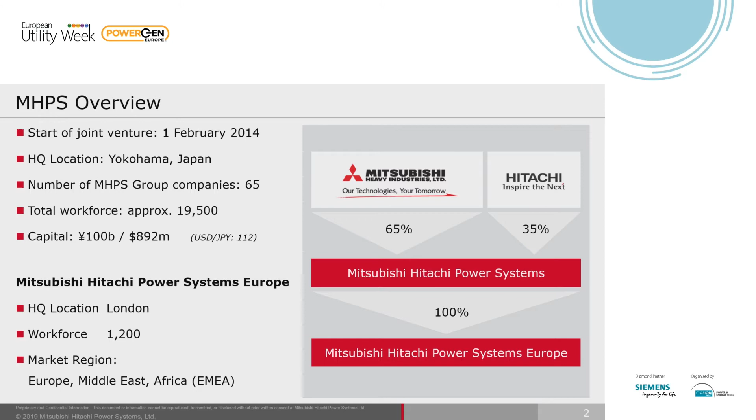So very briefly, I guess everybody knows who Mitsubishi Hitachi Power Systems is. It's a joint venture started in 2014, two-thirds controlled by Mitsubishi Heavy Industries, one-third controlled by Hitachi. In Europe, it has a large track record and names, more than 100 years, around the Deutsche Babcock branding. Things have changed quite substantially since then.

We used to be power plant builders. We have a world-wide track record where, as I'm always saying to my children, we used to be the bad guys - the ones putting into place dirty plants. In fact, these are probably the last two that are under construction, the last of the Mohicans, as they would say. But still, there are places on Earth that need them.

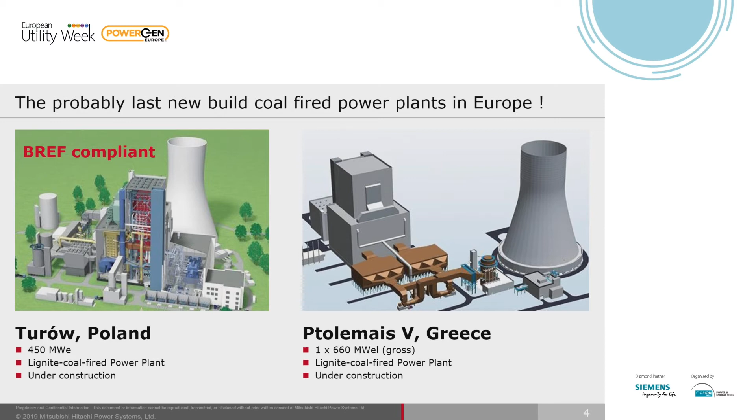But definitely we face a paradigm shift worldwide, and this has to comply with the new challenges that have addressed the branch quite substantially. So responding to the 3Ds, we were able to turn around the ship to meet a number of challenges around the decarbonization of the energy sector.

We feel that the core of the transition is about the commitment on decarbonization, and we built around that enablers like decentralization or digitalization, and commitments and tools like sectoral integration, the circular economy, and so on.

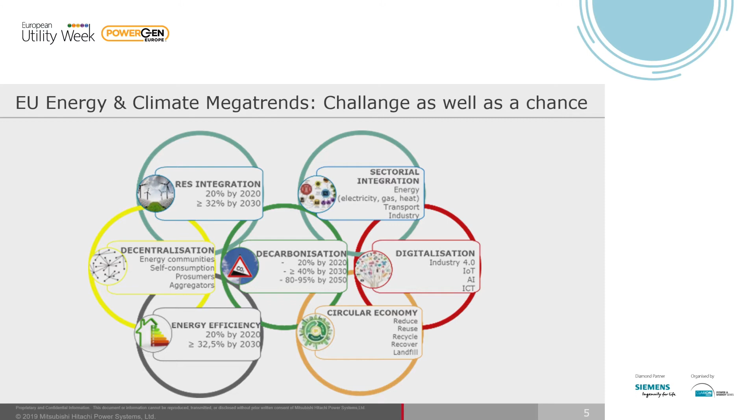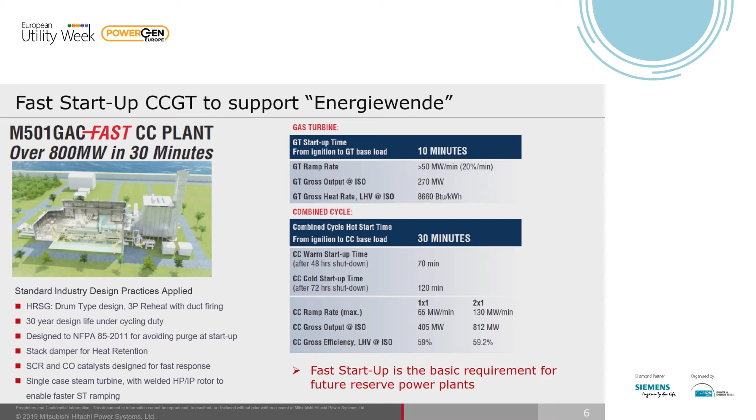So in that framework, we need to adapt our business, and of course we have products, and everybody is talking about gas being the enabler. We have brought products supporting what we call in Germany Energiewende - thermal generation, gas-based, gas turbine. This is something you all know about.

And the same holds true also about combined heat and power. I would like to leave for your thought the new adaptation of the German law on CHP, for instance, that has created an additional market demand on industrial products.

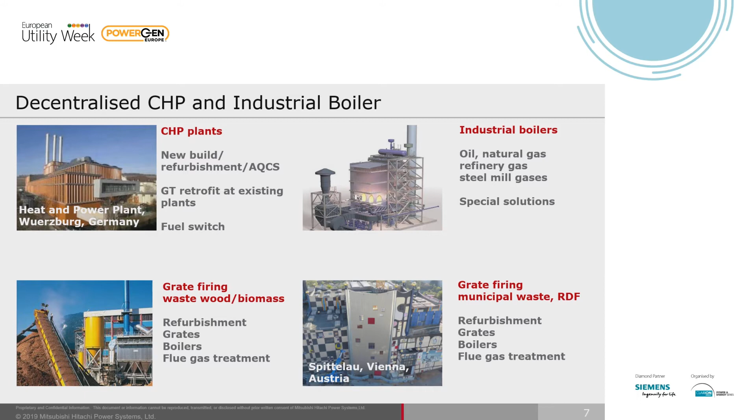So things are changing in what I would say the organic part of the business. Obviously, we have been quite active in zero carbon thermal emission. Zero carbon thermal generation means biomass. We have a vast track record, no need to spend more time on it.

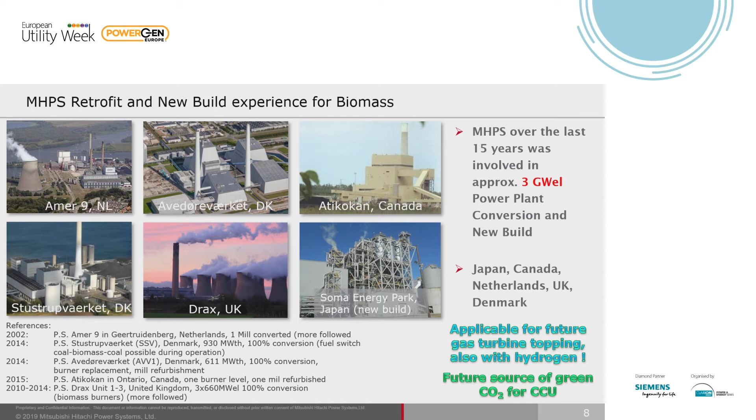We are currently retrofitting a wide number of power plants. So the technology is there, the business case is there, and I have put with green letters in the bottom right corner the word bio-CCS or CCU from biomass. We see the challenge of achieving negative emission sources by decarbonizing biomass-fired plants, but I will come back to that a little bit later.

This is a changing conference, and I have heard the word hydrogen in terms of policies, in terms of strategies, in terms of products. In our conventional business, we are proud to say that we have introduced a full-chain hydrogen strategy that is taking place today. That means we have the technologies to bring carbon-free hydrogen into the market today.

We recognize in our horizon that in the long term, around 2040, maybe a little later, green hydrogen - that means the conversion of renewable electricity into hydrogen via electrolysis - will be the predominant energy carrier. It will play a great role in securing carbon-free thermal generation, as well as industrial use and various applications already highlighted by previous speakers. But we feel that the demand of today and in the short term will be primarily met by what we call blue hydrogen.

That means hydrogen decarbonized at the source, or by means of reforming with integrated CCS - carbon capture, that means.

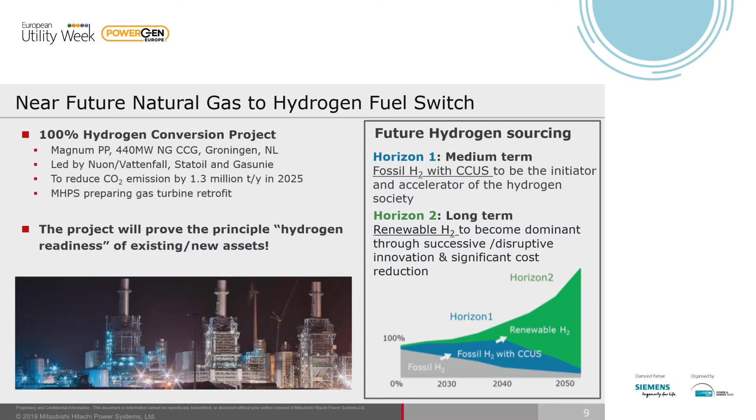Hydrogen that early, by 2025, will be predominantly blue, but carbon-free. We are talking about full decarbonization by 2050. So we feel that in that context, we will be able to avoid stranded assets to the maximum possible extent in the transition towards a carbon-free economy.

Now, this part of the business is, as I told you, the organic conversion - how we manage to change our pattern of products in the big-scale central power generation to accommodate the decarbonization challenge. But this is not the whole story.

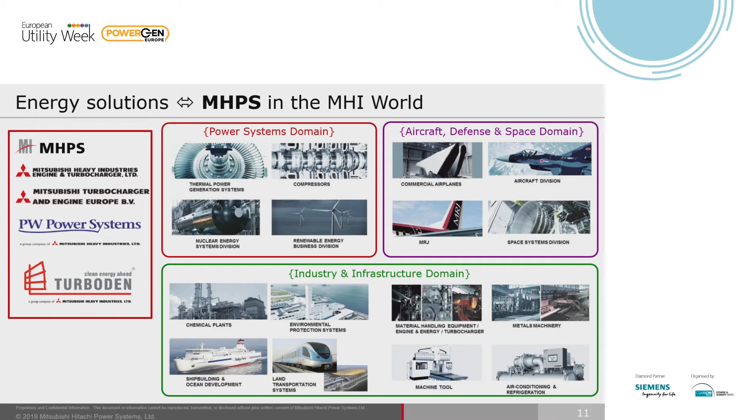The change that I'm implying in the title of my speech comes because of our full integration as a group company of a larger industrial conglomerate, the Mitsubishi Heavy Industries Group. We belong to the power systems domain, meaning we have a bunch of technologies that allow us to have a very complicated but ambitious vision that we have communicated.

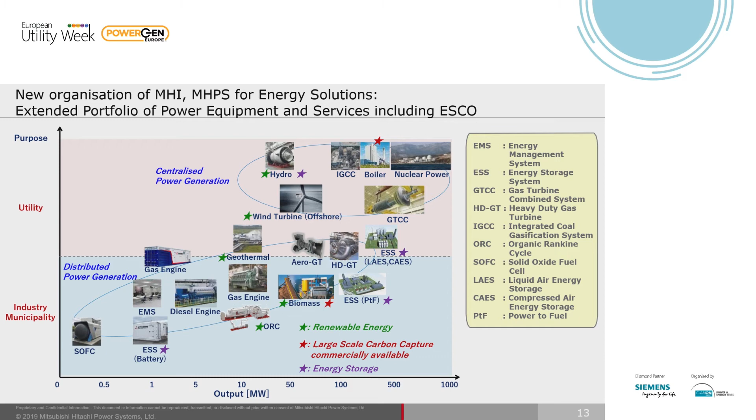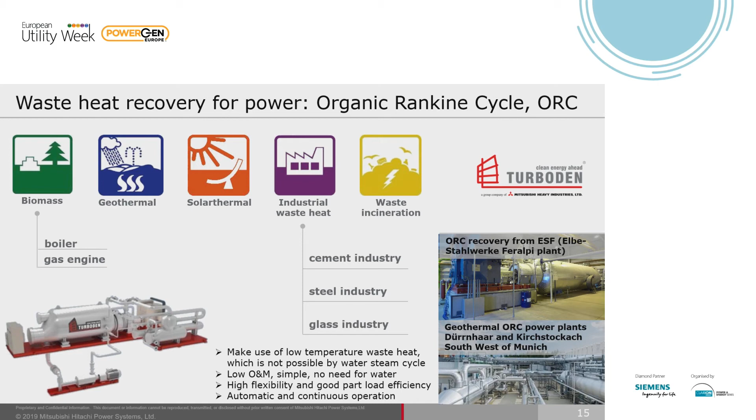That will combine in innovative products, and in the solution business, we understand our role as an integrator of different pieces of technology, starting from the kilowatt scale with our solid oxide fuel cell, moving into batteries, engines, organic cycles, aero gas turbines, up to larger central generation. That will be done in combinations already in the market, such as backup power or waste heat recovery with our organic Rankine cycle, or solid oxide fuel cells.

Needless to say, we are approaching the Tokyo Olympics. Those of you traveling to Japan will witness the Hydrogen Olympics there. We contribute a bit, for instance, with large flagship buildings already powered by our solid oxide fuel cells, which is our contribution to carbon-free CHP.

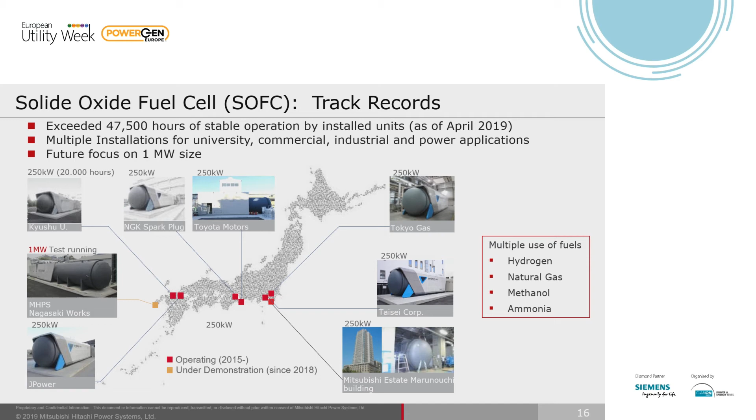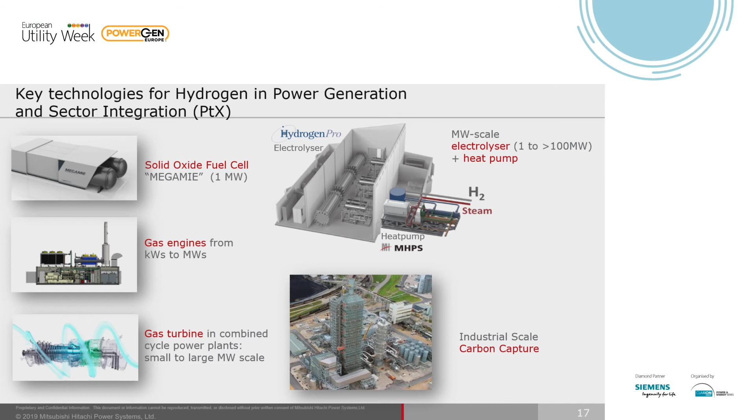That brings me to what we better understand as sectoral integration. That means, on the one hand, developing technologies able to utilize hydrogen from the consumption side, the demand side. On the other hand, we will have technologies using electrolyzers in a very integrated and comprehensive way, together with carbon recycling, to deliver synthetic fuels.

In the last couple of years, pilot projects like the ones we have brought into the market have reached considerable publicity. I had the opportunity to present, for instance, our methanol synthesis project a couple of years ago. Now we are moving to the next level of industrial maturity.

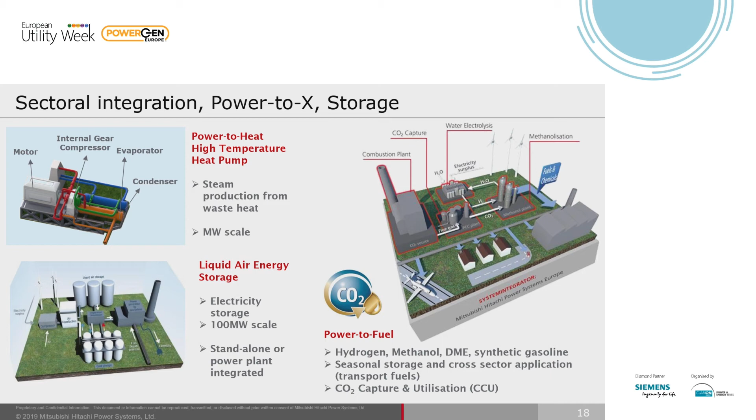My message here is that we have completed a number of research and development and industrial demonstration projects on fuel synthesis from CO2. We are designing, and have constructed, the largest CO2 capture plant, which currently uses CO2 for EOR in Texas - the Petra Nova project, 4,700 tons per day of CO2 separation. We would like to bridge the know-how and capabilities on CO2 capture and our background in the chemical industry toward synthesis of carbon-neutral fuels using CCU as a solution, for instance for Europe as well.

All this is nice, but it could never become a solution unless you have a digital platform. From the integration of assets, we already presented a couple of years ago the Tomoni platform. Tomoni comes from the Japanese word tomodachi, meaning friend - it means cooperation with our partners and clients, optimizing their assets, and on top of that, developing a new strategy on the basis of digital solutions.

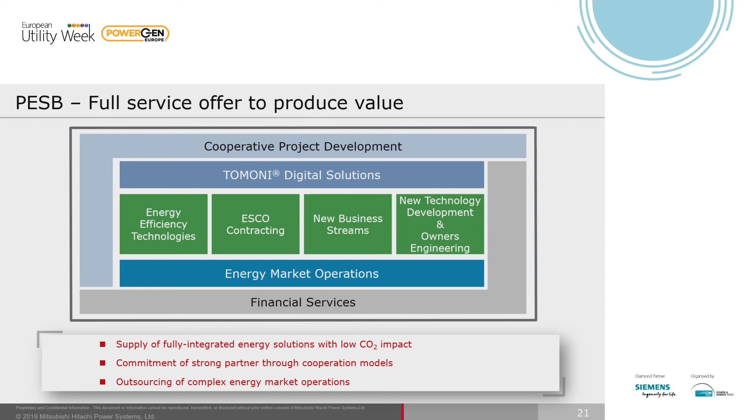So we are moving now from the OEM, from construction of equipment, to an integral operation scheme that includes hardware, IT, artificial intelligence, and a number of new business schemes like the ESCO business, or BOO or BOT. That means nowadays our offering to potential partners extends from fully engineered low carbon solutions to different cooperation models, including financing.

That gives us a very complex picture that took me 4 hours to explain to my board, so I'm not willing to explain it all to you - just illustrating that we were traditionally the gray part. That means we were building equipment, we were EPCs, constructing and maintaining. Green means not only building this equipment carbon-free, but also building different partnerships with different sorts of customers.

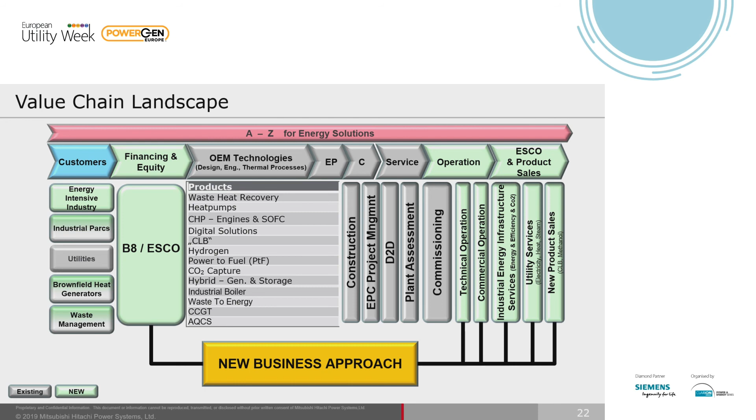We are moving, and this is another change at this conference, from the utility week to the energy users week. So we have partnerships with energy-intensive industries, with industrial parks. We have new business models, and this extends up to financing.

Having said that, let me wrap up on our strategy and our challenges towards the future. Our primary target is to cope with the societal commitment to decarbonization. So we have developed all these sustainability indexes. We feel that we are an integral part of the circular economy, and we think that in that context, hydrogen will play a key role. We have the solution.

We are bringing the solution to deliver carbon-free thermal power, which will be needed also as a backup as we approach what we call deep decarbonization - decarbonization higher than 80%. We feel that sectoral coupling by means of fuel synthesis will be a solution to achieve decarbonization of other sectors as well.

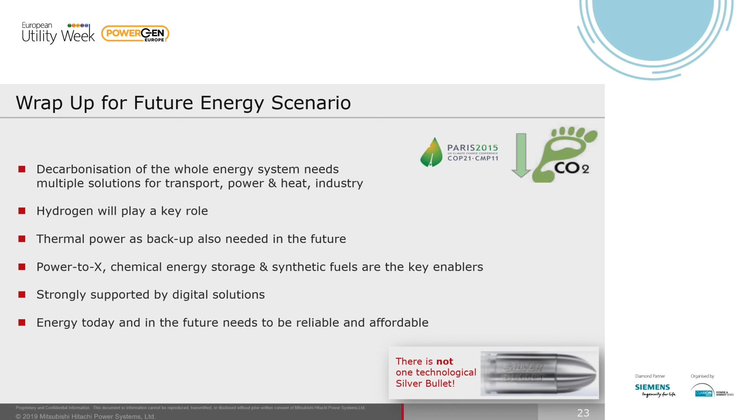I would like to close this presentation by saying that we have not been able to identify the silver bullet for all these challenges. Instead, we have a number of solutions that extend from the easy ones to the most complex ones. The easy ones, the low-hanging fruits, we discussed quite extensively last year - it is electrification, the heat sector, different electricity usages for storage in batteries or for storage into heat. But as we move towards the highest decarbonization targets, we have to address issues like air transport, ship transport, the use of hydrogen and renewable fuels, both for sectors that are lagging behind in decarbonization. For that we need a wide sort of technologies and different business models and partnerships.